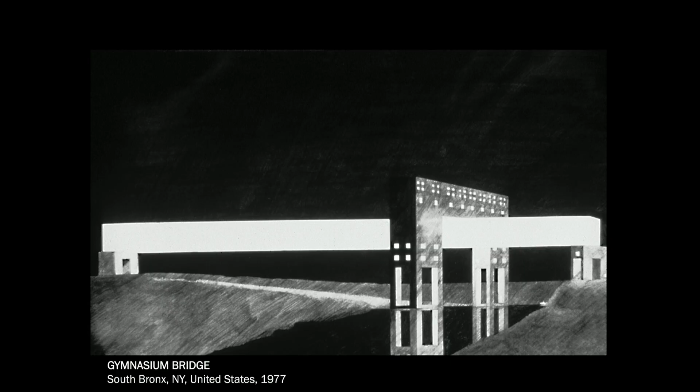So it starts in 1977, Bronx Gymnasium Bridge, a project imagining how people bound in the Bronx could fight their way out. And we imagined a thing called long basketball. You could see it up there, where the basketball court would be stretched to fit into the bridge. And a year later, we did the Bridge of Houses, which was the idea of all the different ways that people can live. There were SRO housing, there was luxury housing, there were dormitories. Different kinds of people live there.

And the idea of taking that High Line and turning it into a public promenade. By the way, that was the first instance that anybody ever thought of that, and now it's one of the great things in New York. We built models, had exhibitions about it.

Two years later, I had a chance to make a house on Martha's Vineyard, and I read Moby Dick, where Herman Melville describes a whale skeleton that is on the beach, and the Indians of Martha's Vineyard draped skin and bark over it and lived in it. That became the metaphor, the idea that drove the design for the Martha's Vineyard house.

In 1988, we won the Berlin Gedenkbibliothek, and the idea was to jump over the original building, the 1950 building. So the entire building became a browsing circuit to activate the composite. In the late 80s and 90s, I did a series of projects called Edge of a City. It was really about the problem in the American landscape.

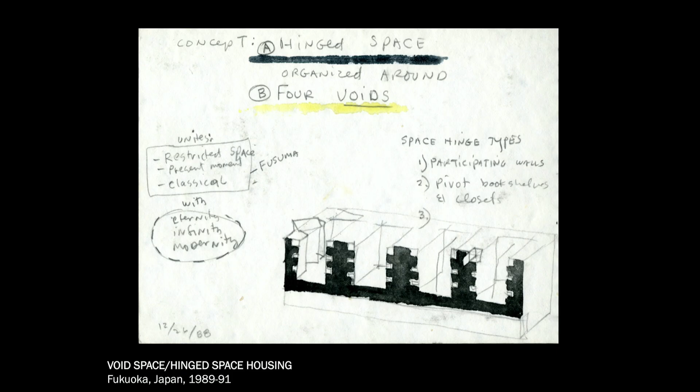Then we were invited by Isozaki to make housing in Fukuoka. I thought, oh my God, what am I going to do? I won't be able to control it. So I had a single pair of ideas: void space and hinge space. The hinge space is about Fusuma and Tsujimi, the Japanese tradition of movable walls, but we made them hinged. The void space is the division of the entire block into four water gardens. There you can see the model, and it's a very successful project.

We were commissioned to do a house in Texas by a very idealistic client, Charles Price, whose father had built the Price Tower in Oklahoma, Frank Lloyd Wright's only skyscraper. So I was really faced with what would be the idea that would drive this design. They took me to the site, and I said, that site doesn't work, I need more space.

The next morning they drove me out to a place where there was a stream and a series of dams. I thought this house could be about stretto, a piece of music where stretto is about moving from one stage to another. We made the whole house about this piece of music. The music by Bela Bartok is in four parts, where the lightweight is divided from the heavyweight. So the whole house is four solid concrete block pavilions with lightweight steel moving between them. The last room is a flooded room where the water comes right back in. I had very idealistic clients, and they built this house.

Almost the same year, I was invited to do the project for Palazzo del Cinema, a very important competition covered in Domus. Every architect got something like three pages for every entry. There was James Stirling, Aldo Rossi, Jean Nouvel. My idea was that cinema is the most powerful form today. You can take what happens in ten years and condense it into a one-hour film, or take what happens in one minute and stretch it into a one-hour film. That concept of an accordion of stretching and expansion about time became the way to do the architecture. It was a project that to me was very important.

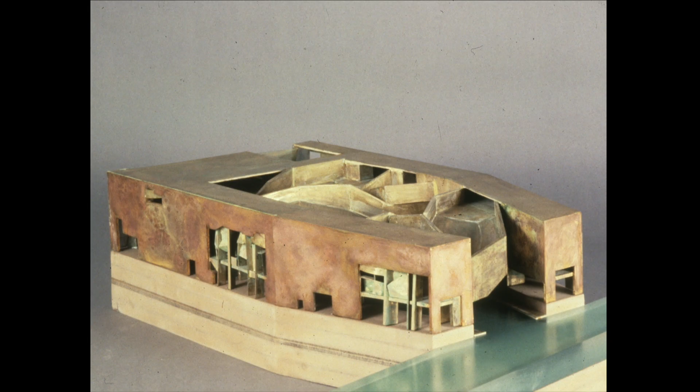It was a seminal project in my life, because at that moment I was kind of unknown, in 1990. We were then invited to do the competition for Kiasma in Helsinki, a great opportunity. I went to the site and imagined this intertwining, the idea that the entire building is a kind of intertwining knot. That was coming from Merleau-Ponty's writings. The last book Merleau-Ponty wrote was The Visible and the Invisible, and the last chapter is called the chiasm, the intertwining. The building was actually named Kiasma, and it comes from Merleau-Ponty.

It's been restored today, it's in really good shape. All the galleries have natural light. I'm very proud of that project.

About two years after that, we were invited to do an entire block in the city of Makuhari, right outside of Tokyo. I said, oh my God, I have to have an idea, this is a big project, what's going to drive this design? I was thinking of the journey to the north by Basho, the great Japanese poet. In this poem, he's moving between pavilions and different places. I thought of the whole block as this journey, forming garden spaces, but then there were these crazy little pavilions, each dedicated to a chapter. The whole block is an exoskeletal concrete structure. It's a very successful project, and it's still there today.

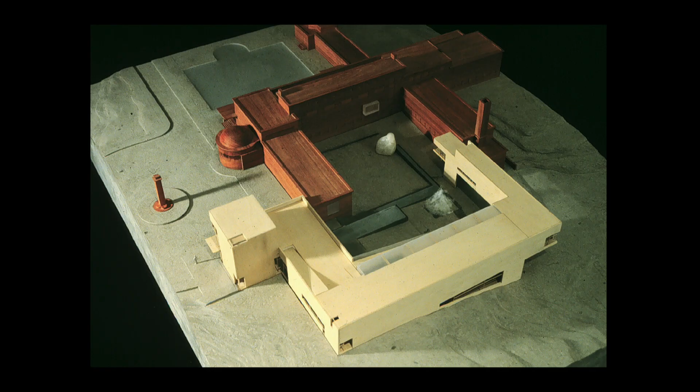Every architect who was being interviewed had to give a lecture, and I gave a lecture about questions of perception.

The Jesuits really have a way of thinking about materiality, light, detail, texture. This notion of seven bottles of light in a stone box really was translated into the narthex, the Blessed Sacrament, the choir, all the different liturgical parts of that building.

It was a long process, and it really is a concept driving the design. It's the idea of an imaginary moment that then follows through the whole design. It's a project really about light and experience.

Going back to that point, you can have an idea that drives a design, but it doesn't necessarily need to be understood by the people who experience the space. They can feel the light, they can feel the power of the architecture, the phenomena. And that's the point.

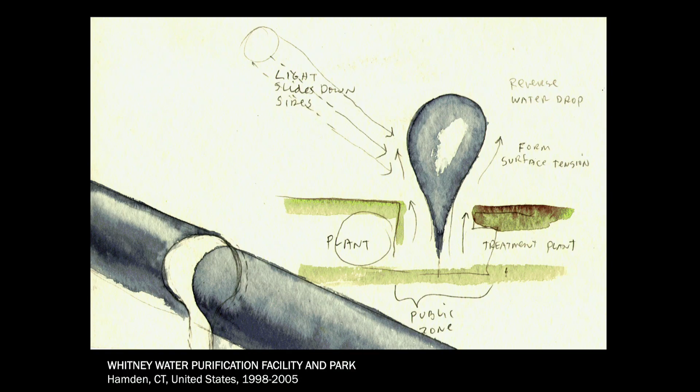And I made this kind of water drop. Maybe it's slightly corny, but everybody followed - all the engineers followed me - and it's the largest green roof in the state of Connecticut.

I think the point about imaginary causes also is if you can get the team and the engineers and everybody to follow you, you can really realize pretty extraordinary architectural projects. But you can't do it from just the pragmatics of the problem.

When we worked in Norway, my father was full-blooded Norwegian, so this is a project very close to my heart. We worked on the Knut Hamsun Center, the museum for the great writer Knut Hamsun. I had read his book, Hunger, when I was in high school, and it's really about a body where invisible forces, psychological forces, are ripping at the body.

So we made this diagram of a body where these invisible forces are acting on it, and each of these balconies has something to do with this novel Hunger and the idea of Knut Hamsun. We produced the design, and then there was a huge controversy, and nothing happened for many years. We won a Progressive Architecture Award. The models are in the Museum of Modern Art, and I thought it would never be built.

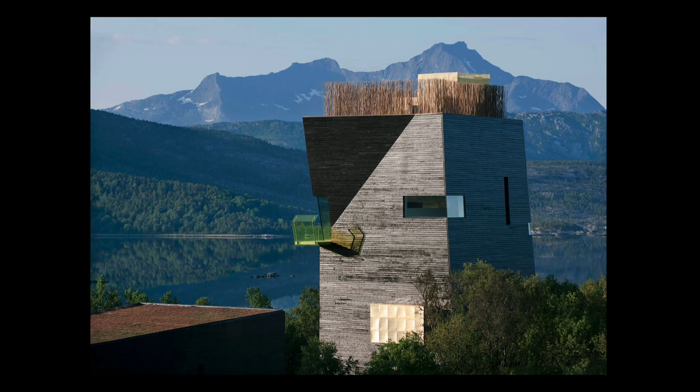But then some Norwegian who was really proud came from Narvik, and he said, I'm going to the government, and we're going to get this funded and get it built. And he did, and it opened. It's been a great experience - it's still functioning very well. I think Iwan Baan showed it in his lecture.

This was a project for a social housing company on Sarphatistraat in Amsterdam. It was a program where they wanted to add a pavilion on the back of this brick building, 17th, 18th century. I was trying to think of an idea that could unify what's going on, all these offices, and then the main space has no particular function. They want to have their Christmas parties there, meetings there.

So there was a pair of ideas. There was a piece of music by Morton Feldman called Patterns in a Chromatic Field, and then there was the idea of a Menger sponge that has the same elevation, plan and section. What's really interesting is because of all this porosity - this is all perforated copper - the color fields are organized and actually located by a chance operation, like Morton Feldman used to make his music.

That also gave us an enormously acoustic space, so you can have meetings in the corner - different people who work there can have meetings in various places all around this building. So this crazy beginning, with this imaginary thought of a piece of music and a Menger sponge coming together, organized something that was very, very original.

I went to the site - this was 1997. There was a house. I had a client who wanted a kind of New York loft up in the mountains, north of New York, four hours north of New York.

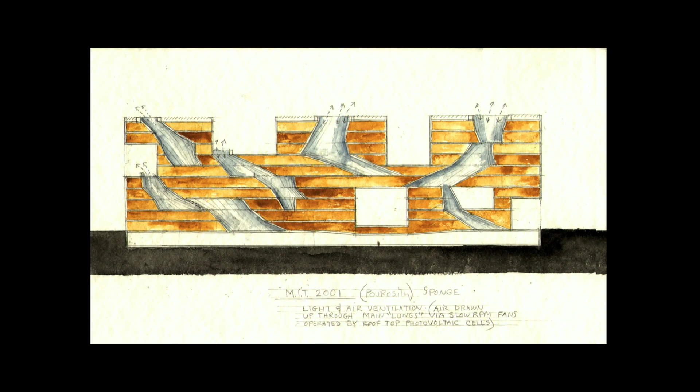I was given the chance to make a big dormitory, like 350 rooms at MIT, and the problem was complex and the timing was very short. We had the idea of porosity, that the building would be a complete porous thing, and the public areas would be connected almost like a carving out. So there's 10 floors, and then there's a kind of carving out.

I got the commission because I told the chancellor, Vassar Street shouldn't be a brick wall. They had a master plan, which was a brick wall that went down Vassar Street, and I thought that's really terrible. We were being interviewed, there were like 3 architects in the final round, and it was Chancellor Bacow. I said, listen, we would like to do a new master plan. Can you give us 6 weeks? He said yes.

Then I made a master plan for the whole of Vassar Street that every building would be porous. So you have the horizontal porosity, then the vertical porosity, the all-over porosity. We ended up building the all-over porosity, which is still functioning very well. We were just there - my wife Dimitra, who's a great architect, a great collaborator. We were visiting there with our kids, and the kids loved it, and everybody living there.

It's been 15 years. When I was invited to do the competition for the Nelson-Atkins Museum, all the architects were supposed to build on the north side of the building, which is on the right hand - you see that black, that's a 1933 neoclassical building. They were directed to build on the north side.

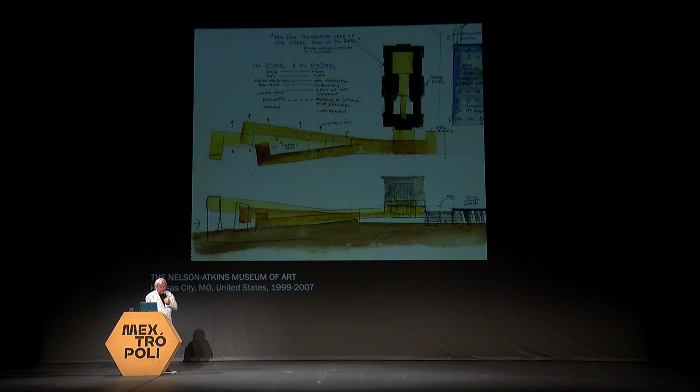And I said we can't do that, that's not an ideal way to add on to this building. When I went down on the landscape, I refused their directive, and we were the only architect that broke the rules. Tadao Ando slammed it right up against it, Portzamparc slammed it right up against the north. I said, I apologize, because in your original stone facade there's an inscription that says the soul has greater need of the ideal than of the real. That's where I got the courage to break the rules and try this addition.

That was one of those moments where the idea that drives the design is really why you win the competition. You take risks. If you have an idea, you imagine something, you take risks, everybody follows you, and then you can do something you would never be able to do without that crazy, non-rational moment in the beginning.

In the beginning of the project for the School of Art, in the middle of America, in Iowa, a very conservative place - University of Iowa - we were invited by very great people. Dorothy, the head of the art department, was really wanting a great building. So we had this thought of actually cantilevering the building out over the lagoon and making the whole building out of Corten steel, a planar construction.

And it's still there today. And this idea of planarity, folding up, going up, also gives a way of dealing with the interior. So the stairs that move you through the building are a series of folding planes cascading down through the building.

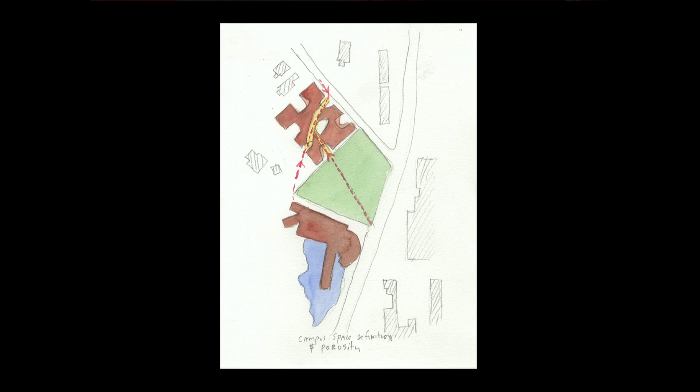Then several years later, we were invited to do an addition. It wasn't really an invitation, it was another competition against Diller Scofidio and a bunch of people. So we came to the site, and now, because I had built the first building over the lagoon, the great green space, a quadrangle, could be given over to the art school, because there were going to be two parts. I won't tell you the whole story of the flooding and everything that caused this to happen, but the point is, we had a struggle because Kenneth Frampton said, Stephen, you should build that in Corten like you built the first building.

And I said, well, why? He said, well, it's a university, you should make everything kind of coherent. I tried so many schemes and I didn't like it, and everybody in the office agreed we have to do something else. And then we said, okay, the first building was about planar construction, and the whole thing is an abstraction of plane, almost like cubist construction.

And then the second building is volumetric, made out of double layers, and it has a series of light cuts that bring light and organize social space in all parts of the building. It's 300 feet by 300 feet, a very big project, and as you go down through the building you have social space - it's really a way of organizing everything. This is, by the way, nearly a net zero building, with geothermal heating and cooling, green roofs, many different aspects, but that's not what my talk is about.

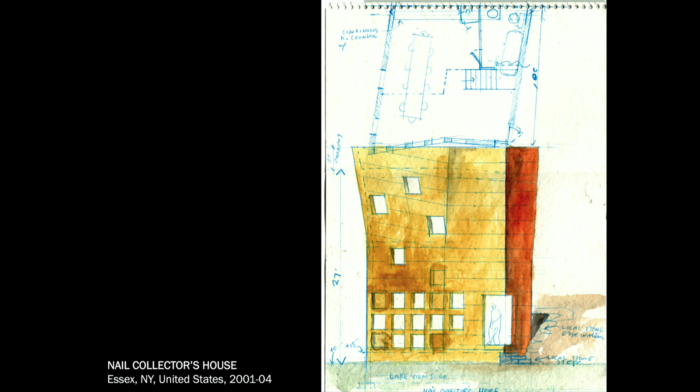And he had a nail collection, because on this site there was a series of square-headed nails from the 19th and 18th century in upstate New York. So I made the idea based on cartridge brass and exposed nails, and that became the driving concept, which he loved, and it's still there today. It's sitting on this old site where there was a nail factory, in Essex, New York - that's the lake that connects to Canada up there.

I was invited to Beijing after we were invited by Isozaki to do the Nanjing Museum. I was invited to do these 8 towers that were supposed to be built according to the planning diagram, and they wanted to keep the central space with a bunch of factories, using them as art buildings. I said, listen, if you give us 3 months, we're going to do an ideal design for you. And they did - they gave us 3 months, and we proposed that these 8 buildings would be linked by bridges full of functions, like a swimming pool in one of them, and instead of the old factory in the middle, we built a cinematheque and water gardens.

This is 2002, and everything in China was happening for 2008 - everybody was very excited to do something really ambitious. So we presented this and I thought they'll never build it, it's too far out there. About a month later they sent an email saying, we've looked at your project - it had cinematheques, a nursery school, bridges with swimming pools - it greatly exceeds our budget. However, we want to build the whole thing, don't take anything out, which was amazing. And that's how the linked hybrid got built.

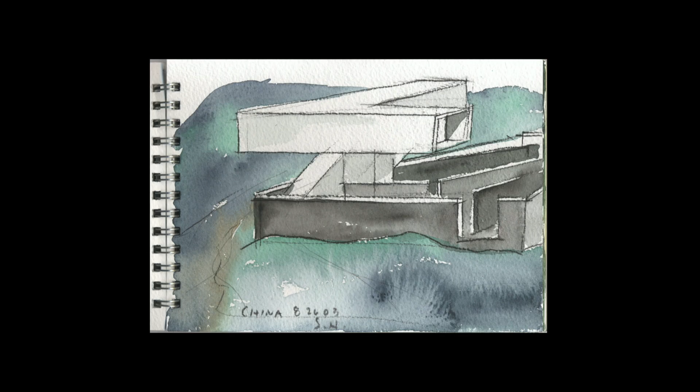Actually, we have our office there in one of the areas. And this is the building that got me to China in the first place - it was Isozaki inviting us to come, and I was a little bit frightened. If you go online there's a whole video that explains this building in detail; to do it justice briefly, it was the notion of projecting an axonometric of Chinese watercolors - everything was black and white, and the idea of the projected space was what organized the building. It's kind of the head building there, an architecture exhibition really, in a park just outside of Nanjing.

We entered a competition for the Herning Museum in Herning, Denmark. That year I was really nervous because I kind of ran out of time, and we actually did this competition very quickly.

They had the greatest collection of Piero Manzoni, the great artist who used fabrics. There was a shirt factory on the site, and the owner invited Piero Manzoni to come. You can see the shirt factory is that round thing in the corner. I had this idea of shirt sleeves draped over the basic rectangle of the building, bringing the light in a curve. That idea drove the design, and we won the competition.

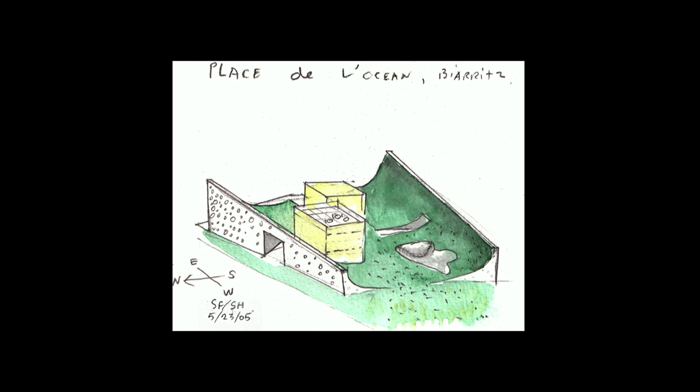Holger Reenberg was a great client. Another competition we won that same year was in Biarritz for the Museum of the Surf and the Sea. The notion was that under the sky and under the sea, the whole building would tilt and aim itself toward the ocean horizon. It's a simple building, there were like 8 competing architects, and we won it. It's there now in Biarritz today, my only building in France.

We were invited, after the Beijing linked hybrid was under construction, to do a very large project for Vanke in Shenzhen, a headquarters, a hotel, their offices, apartments. I thought, it's right there on the sea, so why not just raise the entire building up to the height limit and open up the whole landscape down below as a public space, a tropical landscape.

When I presented this project, Wang Shi, the director of Vanke, there was a room with about 10 Chinese all around the table. I was presenting the competition, and he said, I want to hear what everybody else thinks. Nobody in the room had the courage to say they liked it. But when he got around to it, he said, I love this idea, and I love the shape, and he put his hand out like that.

And that was it. I think I saw him two more times. We won the competition, and this is the kind of thing that was going on in China at the time - they got the building permit in 10 days, for a building that's elevated about 30 meters in the air. Anyway, that's a different lecture.

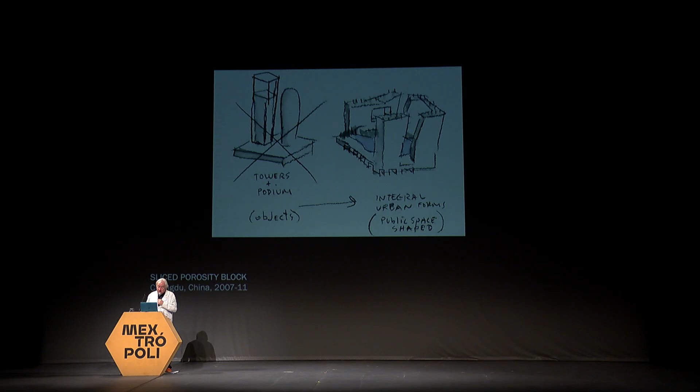3 million square feet, it's the biggest project we ever did. And I said no, and I made these watercolors. I said what we want instead is an integral urban form with the housing, the hotel, the offices, forming a giant public space for everyone. Not only that, it would be geothermally heated and cooled, with kind of micro-urbanism where the shops from the shopping mall would have fronts on the street all the way around.

The building had to be organized by these light shafts bringing light down to the adjacent housing. Once we made the diagram, it had to be sliced by these angles of light, and that's where I gave it the name sliced porosity block. It's an exoskeletal frame, so you're looking at the structure, not any skin, which I think is really wonderful because you have layouts that are very open. There are no columns, so all that structure is on the outside.

And then we did these buildings within buildings - you see these cuts. Lebbeus Woods's largest building that he ever did, the Light Pavilion, is on the right-hand side.

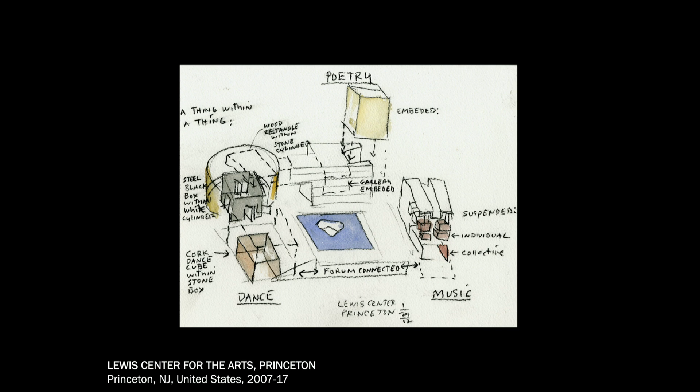Then in Princeton, we were given the chance to do the Lewis Center for the Arts. Very interesting project—it's basically the entrance to the Princeton campus. I thought, let's make it in three parts, each with its own idea, because you have the music, the performance, theater and dance. So each section of this kind of U-shape has another idea driving it. And everything is golden section proportions, which is something all of our work relates to. The proportioning of architecture is infinitely important to me. There you see the model, the Lewis Center for the Arts, and that opened in 2017.

It's a long story—I could spend an hour giving a talk on this. It's a very important project, and there's a video on it if you're interested to watch it online.

I had an interesting moment where a man came to me from Korea and asked for an ideal house. He had interviewed all these important New York architects. I had a kind of crisis because it's an interesting urban site, but other than his basic program—he had the idea of a guest house, wanted a house and a guest house—I didn't really have a direction. In fact, I made a series of really bad, throwaway designs.

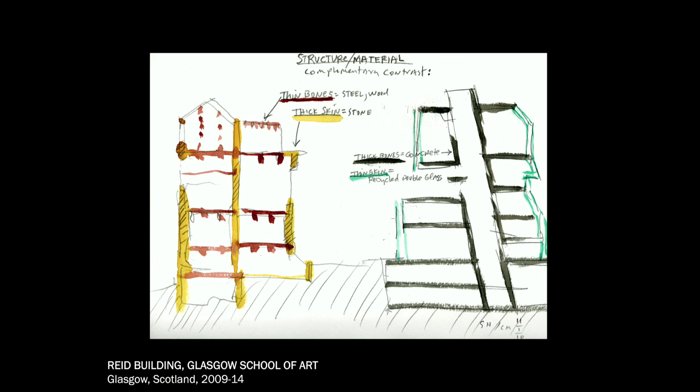When we were invited to do the competition in Glasgow for the Glasgow School of Art, I looked at the great building by Mackintosh, and I saw the structure is sort of light bones and heavy outside—heavy, thick masonry outside. I said we should reverse that. We'll make very light recycled glass outside and heavy tubes that support the building on the inside. These are driven voids of light, also a strange thought. We won the competition, and that's a long story, but it's functioning very well right now in Glasgow.

If you go to Glasgow... I was given the chance to do the Queens Library, a community library, and the site was very large. In fact, the whole library could have been built on one floor. But I said, listen, one of the great things about this site is you see Manhattan. To give the public this fantastic view of Manhattan from Queens across the river—and it's situated right by Lou Kahn's last project, the FDR Memorial—I thought, you've got to make it vertical. It's a long story, but this idea of proceeding through the building, up the stairs, past the bookcases, children's library in these cuts, public space on top—it's still there and functioning very well in Queens.

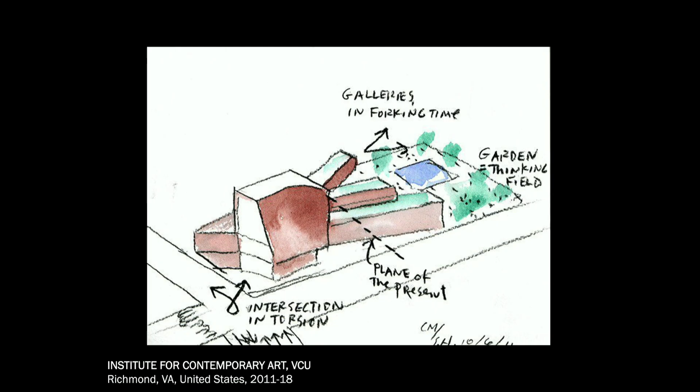Down in Richmond, Virginia, a very conservative town, we were invited to do a project for the Institute for Contemporary Art. I went to Borges, the Garden of Forking Paths, a great book by Borges, which is a little bit about time. The way I explained this project: today, this is a contemporary art museum, and there's no grand narrative. You could say in the abstract expressionist period there was a grand narrative, in the Cubist period there was a grand narrative, but today painters paint incredible things, sculptors are working—there's no grand narrative. So it's a forking building, and that was realized and opened in 2018.

I'm running out of time—that's what's going to happen here. Look at that. So you'll have to look this up on my website.

This is where we, again, refused the competition rules. We tore down the Glassell School of Art, put the parking all underground, and realized the Glassell School and the Museum of Fine Arts in Houston. Again, breaking the rules was very important.

And the Kennedy Center, similar. They said you can't build it in the garden out there like that, but we did it. We broke the rules, and that was realized and opened in 2019.

It's fantastic. And the Institute for Advanced Studies in Princeton, also a very important project, against a number of illustrious architects, which we realized again with this not-so-crazy idea.

And the Meander building, a housing building which is bounded by blocks all the way around. So instead of putting an urban block, the idea was that you could shape the space, shape these garden spaces all around this building. And that became... and this house - time's up. All right, I won't talk about it.

That's a building we jumped over, in Ostrava. It's under construction. It's a music hall. And the point of the lecture, I think, is clear. I'm sorry there's too many buildings.

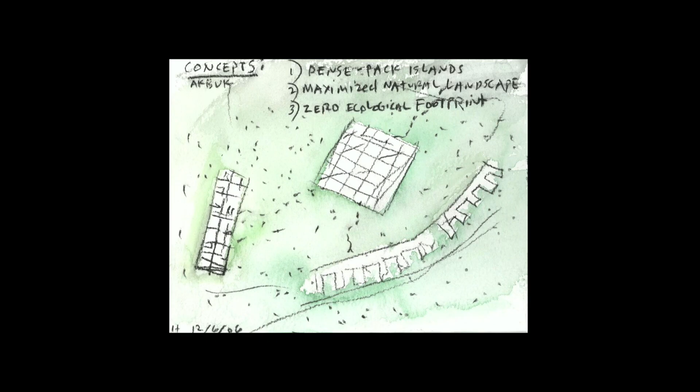I just want to end with this, because I started this in 2006. I had the idea of a dense pack. I said, let's just organize all these houses - it's quite a big piece in Akbuk, Turkey. We'll put some of them under the ground, some in the ground, some over the ground, in 3 parts. And we presented the project. It's really interesting because it's like a city. It has a chapel and a public space, and now they're building the whole thing.

It's a very long story, but I'm very proud that idea has been taken up by another developer after it sat for many years. So I'm still working on a project after 17 years, and my point there, to end with, is architecture takes time. Thank you.

Che commissioned us to imagine and envision a seed bank and ecology library as potential inter-Korean collaboration. We proposed repurposing one of the 4 tunnels North Korea excavated in the 1970s, now dark tourism destinations. Tunnel 2 would become our vault for life and knowledge, an analog archive for seeds and ecological knowledge.

Our intervention began with a 10-meter excavation where 2 tragic man-made lines intersect, the border and tunnel. This acts as a landscape acupuncture, relieving territorial tension and restoring natural energy flow while making renewal. Granite rock blocks excavated from the void would migrate gradually to both sides, north and south, forming a scale plinth for 2 preparation facilities, one housing the seed bank, the other the ecology library.

This year, Che launched naturalrules.net, a beautifully designed platform documenting DMZ ecology extensively. You can check your phone. Visitors can purchase seed bombs for 70 cents each. Collective landscape nurturing through drone-facilitated DMZ reforestation. Che's retrospective opens later this month at Seoul Museum of Art, and it will be a beautiful exhibition as well as compelling campaign.

Let me briefly go back to the Korean Pavilion in 2014. Among the exhibition images was Kim Jong-up's French embassy in Seoul. Though photographically unremarkable, architectural historians canonize this building as one of Korea's most significant 20th century modern works. Completed in 1961, it represents early work of Kim Jong-up, who spent 4 years with Le Corbusier in 1950s Paris.

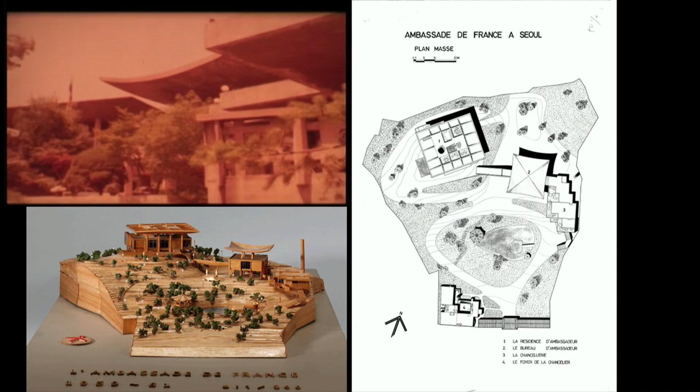The original embassy ensemble crowned a gentle 15-meter hill as a cascading triptych: residence above, curved roof pavilion, and office annex. The pavilion's curved roof was most distinctive, clearly echoing Le Corbusier's unbuilt governor's palace in Chandigarh, which Kim worked on. Yet its abstract spherical surface carved into a square plan also evokes traditional Korean roof profiles.

Kim studied how Korean mountain temples engage topography, evident throughout the embassy ensemble. However, unlike the traditional temples that nestle modestly in valleys, this ensemble sits prominently on the hilltop. With the Han River once visible 3 kilometers away, its positioning reflects Le Corbusier's Acropolis ideal over Korean precedents, a unique fusion of influences that was.

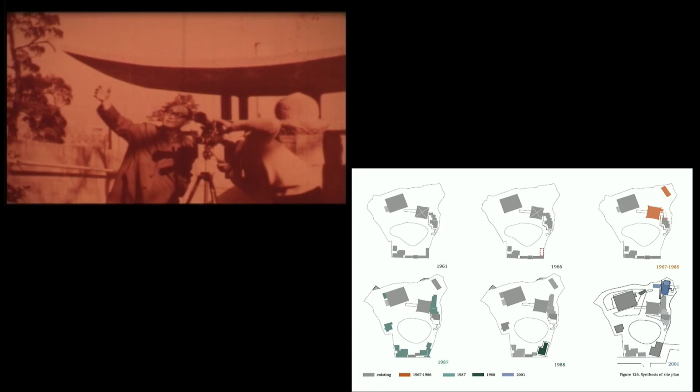60 years later, this French territory has grown haphazardly to increase capacity. The pavilion suffered significantly, nearing collapse due to poor construction quality, then was tragically compromised when recreated in the 1970s—the reason why we couldn't obtain proper photographs for the Venice show.

Both the embassy ground and the surrounding city evolved from single-story wooden houses to 16-story towers. This transformed the former hilltop complex into one now nestled in an artificial valley, ironically creating conditions more aligned with the traditional Korean temple placement.

In 2015, we collaborated with the Korean-French architect Yoon Tae-hoon and his Parisian firm Sathy, winning the competition to restore the pavilion and add workspace four times larger than the original size. Our challenge was playing a supporting role through a much larger scale to this historically significant building.

We introduced two elements. The unrecognizable annex becomes La Jetée, a two-story, 60-meter horizontal building, maintaining the old annex's sectional relationship. It houses public functions, visa services, meetings, and new exhibition space. Second, we designed a 10-story tower for high-security workspaces.

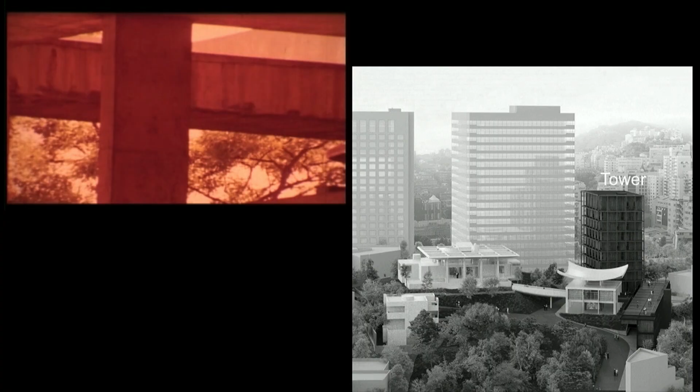This compact tower mediates between the original complex and the radically verticalized urban context, offering intermediate scale while enhancing exterior visibility. In plan, both new buildings relate to the original structures in distinct directions.

La Jetée adopts the same 4.5 meter square grid module as the original pavilion. The pavilion was completely rebuilt to identical original dimensions while embedding four central steel columns for seismic requirements. The roof was post-tensioned from above while preserving the exact formwork finish below. We relied on not so many drawings, photos, and movie clips, and so on.

After completion, Kim Jong-up's apprentices, now in their 70s and 80s, gathered for a ceremony where the French government officially designated the Kim Jong-up Pavilion—a building surviving three reconstructions over 62 years, within its context transformed from mountain to valley.

Fourth challenge: mountain becomes valley, expands into exploration of urban transformations over the same period in the next project, subtitled Rocky Riverscape Become Flat, which examines the changes along the Han River in Seoul.

Yes, it was quite a brutal process because all the rock became riverbanks for flood prevention, and this is what we call the miracle of the Han River. Located at what was considered one of the 8 great viewing points of the Western Han River in the past.

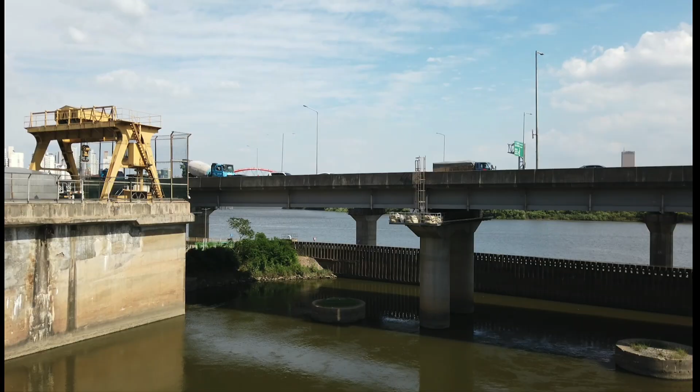It is now trapped between a high-speed road and high-rise apartments through the rapid flattening process. The site's riverside ground surface barely exists, offering no river views despite its proximity.

So our main idea was to amplify the potential for accessible collective space by proposing the Dangin-ri Podium, a place that substitutes for the viewing points of a rocky, hilly pass along the Han River.

We've connected and rebuilt the lightweight rooftops of two turbine halls, 18 meters above ground, as a 130-meter-long elevated public space with escalators that offer direct access without needing to pass through the building's interior.

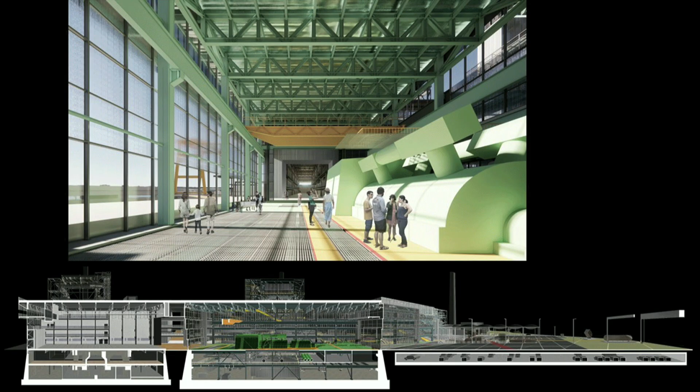And on the ground level, turbine hall 4 is converted into a black box theater, and 5 is preserved. The two linear spaces can be connected by raising linear vertical lift doors, creating a 130-meter-long space, which further expands into a 120-meter-long linear outdoor space, a public plaza with underground parking below—resulting in a combined 250-meter-long indoor-outdoor space, ideal for large events.

So Plant 5's boiler is kept as industrial heritage, while Plant 4's boiler is removed, creating a 49-meter-tall void. The void is divided vertically into 3 parts: exhibition space 10 meters below ground, and a large gathering lounge on the 2nd floor, both connected by ramps along the edges.

Above the podium, the remaining 21-meter-tall top portion of the structure, which once suspended the boiler, will be repurposed as a hyper-pavilion, with bleachers on the podium and a lightweight roof above.

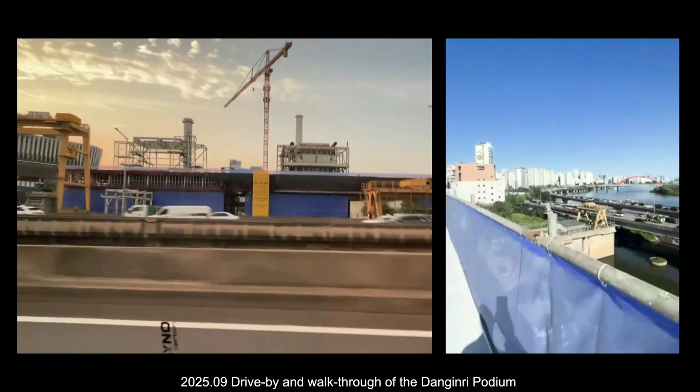The original boiler maintenance catwalk remains as a viewing promenade that completely envelops this 49-meter void in a spiraling sequence, offering spectacular views of interior activities and the completely transformed Han River with its artificial topography.

Okay, here's another thing about the movie now. Chungmuro's transformation tells the story of Korean cinema itself. In the 50s, this district earned the nickname Hollywood of Seoul, becoming the epicenter of Korea's film industry. The golden age arrived in the 60s when cinema was a dominant entertainment medium.

Legendary theaters attracted people with marquees, and of course TV challenged the dominance. In the late 1990s, Korea became democratic with freedom of expression, which nurtured a generation of filmmakers like Park Chan-wook and Bong Joon-ho, who later gained international acclaim, coming out during this era as independent filmmakers. But at the same time, it became a global industry, so old theaters became multiplexes, complexes became a sort of pseudo-urban experience—what used to be essentially a very exciting urban experience.

So our first architectural engagement with Chungmuro came in 2001. While practicing with James Slade in New York, we partnered with Kim Kwang-soo in Seoul to transform an underused Chungmuro subway passage. Seoul's cultural department envisioned it as a cinema gallery, essentially movie poster displays for 2002 World Cup tourists.

However, our collaborator, the Independent Filmmaker Association, had bigger dreams. This young, predominantly female collective demanded a genuine community hub for film activities. So we responded by designing a linear sequence within the 6-meter by 70-meter long passage: a flexible 50-seat theater, an experimental film archive, intimate viewing lounges—revolutionary before YouTube existed—and a cutting-edge digital production classroom.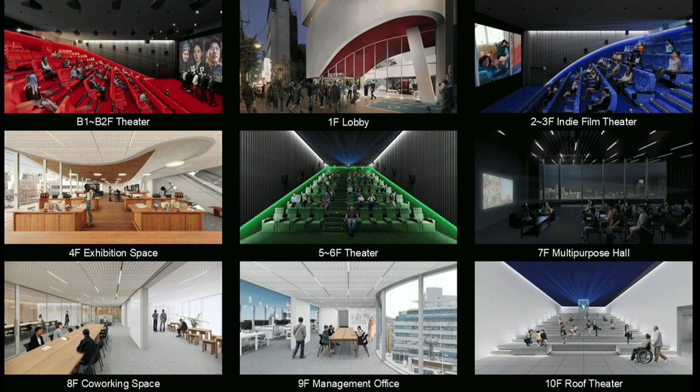This journey spans 23 years, from a 70-meter horizontal tunnel to a 60-meter vertical tower. Both subway passages and towers can feel like anonymous non-places, yet in each case we've crafted, I think, quite rich spatial montages that respond to urban constraints while nurturing Chungmuro's evolving creative community.

The next one is only steps away from Seoul's historic center. It's about religion, 100 meters from Changgyeonggung Palace. Won Buddhism emerged in 1916 as Korea's modern spiritual movement, with roughly 700,000 followers in Korea. This Zen Buddhism sect centers on the circle as both philosophical guide and cosmic symbol. As an agnostic, I found it quite interesting that modern ideas such as circularity or circular economy now resonate with this religion that started more than 100 years ago.

Here's our first encounter: the former temple had to be replaced due to aging. We inherited a half-century-old temple requiring complete reconstruction within Seoul's chaotic collision, where centuries of architectural styles, scales, and materials create a cacophonous symphony in a way.

The challenge was 4 distinct buildings across 3 sites, each serving different congregational needs. On the main road, 14-story towers dominate, yet a fragment of the original hillside persists, connecting to traditional alleyways behind the modern wall of towers. Our first intervention transformed a former residence into a 3-story annex, housing meditation offices and flexible space as a sort of pop-up space—right now it's a children's bookstore.

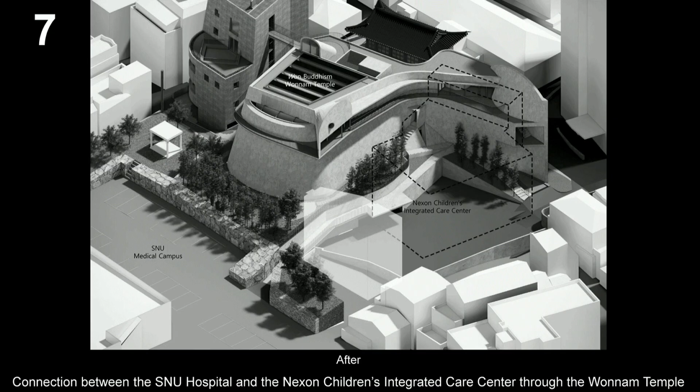This circulation became a three-dimensional promenade, what they call 'paths of enlightenment,' punctuated by moments of stillness in movement, such as the prayer room at the top of the Dharma building, which finally revealed the genius loci — why it was placed there 70 years ago, with the palace view.

The top view here is the monastery rooftop, which almost culminates like a panoramic view, like the end credits of a movie, where all the protagonists of this urban element, from the very beginning to the 21st century, reveal themselves.

Lastly, I'm going to talk about the seventh challenge. This year marks the 25th anniversary of the Serpentine Pavilion program, and I was honored to design last year's pavilion, which felt like a great riddle and quite an unexpected opportunity.

Okay, I have to, sorry.

When the program started in 2001 with such optimism about the new millennium, Google had just started. We thought we'd all become connected and happy, celebrating diversity. Then the smartphone appeared a few years later, in 2007 and so on.

A quarter century and two dozen Serpentine pavilions later, we are somewhere in a quite different place. Looking at the floor plans of the previous pavilions — 8 were circular or round, 6 rectangular — so two-thirds were complete geometry, and the rest free form.

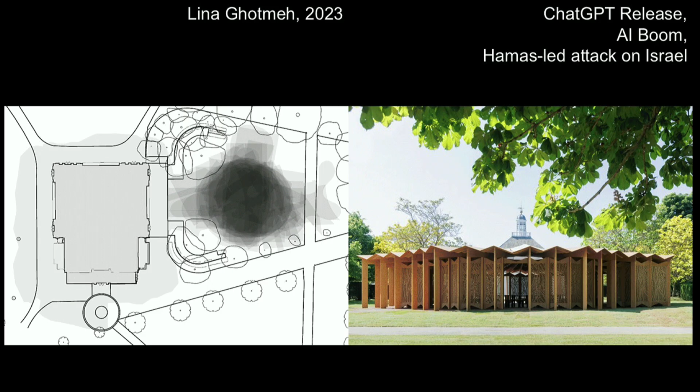Look at our own pavilions — Mass Studies started in 2003. Almost during the same period, we also proposed many circular plan structures, for some reason, almost two-thirds. In fact, we can trace this tendency toward utopian completeness through the entire 20th century, from Bruno Taut, Buckminster Fuller, the hippie era's Drop City, and so on.

So first, we decided to give the most overused central territory of the Serpentine lawn a rest by creating a void, and began to look at what could happen at the periphery.

Each structure, or what we call an island, is simple. Each outer tip of the island is unique in shape, form and scale — wide to narrow, high to low, small to large. However, toward the center, all 5 islands share the same end condition, the same arc length at the same height, coming together to form an 8-meter diameter circular void.

Each island was given a specific program, a distinct function, yet remained flexible. The gallery welcomes you at the main entry with a sound installation made with a close friend, Korean composer Jang Young-gyu.

The auditorium is the largest room, serving as a general gathering area and performance venue. Again, my good friend Eun-me Ahn brought a troupe to perform a piece called North Korea Dance.

For the library, we tried to reflect the Korean literary tradition within this genre of architecture, teaming up with Singaporean artist Heman Chong on a conceptual serial work titled Library of Unread Books.

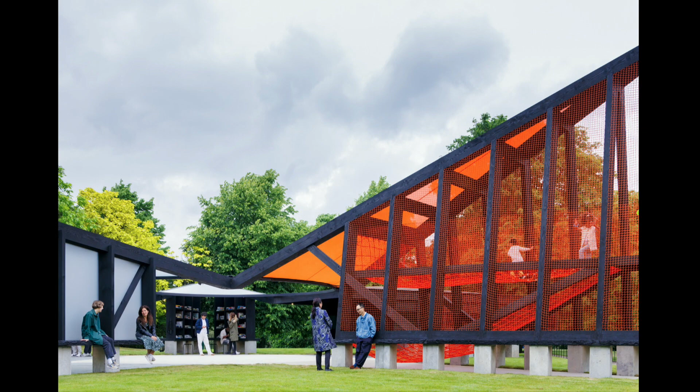Lastly, the play tower — a narrow, 7-meter tall structure, which was quite popular with children and students.

These five covered spaces alternate with five open spaces in between them, with the madang, the central void, at the center. In the end, all eleven spaces maintain distinct characters yet stay very connected. The pavilion created an appropriately scaled space with a balance of openness and enclosure, distance and intimacy, allowing occupants to be apart or to be together.

The central void is this Korean madang, which in a Korean house supports the everyday to some big collective rituals, and many unexpected events happen there. Together with sound, taste, and scent, tactile experience was also generated by the soft pine wood structure that functions also as benches and counters.

Natural timber was used on this lawn for the first time, sourced from Surrey, just thirty kilometers away. We exposed modern joinery techniques alongside traditional joinery, a dialogue between vernacular and contemporary. We also used natural stone paving, lightly fixed for reuse, and low-carbon, reusable precast concrete and foundation for the plinth, so it's all reusable.

The plinths utilize topographic changes, installed at the same height while the entire site slopes about seventy centimeters. At the highest level, they're used as benches at the auditorium, starting at thirty centimeter height, then gradually becoming one meter tall on the other end to use as a counter surface for the tea house.

Sorry about that. But here's a selection of projects on the drawing board right now. I'm doing a Faculty of Information, top left, at the University of Toronto, towers in the Olympic Park, co-housing projects in London, a science pavilion hub in Cambridge, and towers in Taiwan. So a pretty diverse array of projects.

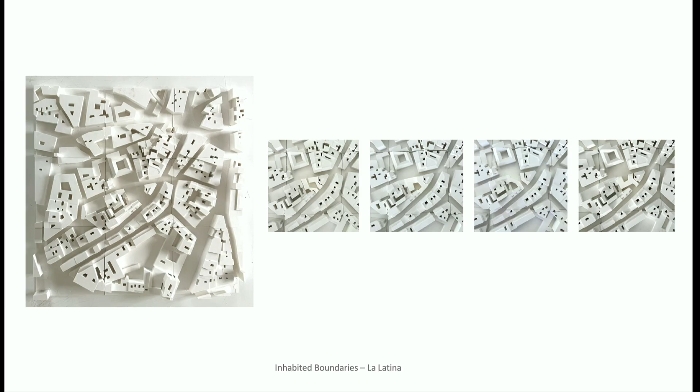Many students from this side of the Atlantic, and we worked on a site in La Latina in Madrid. Here you can see the empty site in the middle of the model, and there are four different variations of a housing project as an infill on the site of a former fort, the Wall of Madrid. All of these projects explore the nature of the wall and how we might inhabit it, as a means of communion and dialogue with the street, and as a way of embracing nature.

So I have a large portfolio of housing. A lot of it is working with geometry to alleviate density. I've also exhibited twice at the Venice Biennale, both within a theme of housing.

In 2018, the Grafton Architects curated the Venice Biennale with the theme of Free Space. This installation explored four key elements or ideas in housing. So these four totems each have an identity. The arch is expressing or offering the experience of threshold.

Another totem is inhabited roofs. Another one is the idea of passage and journey. And the one on the right is inhabited boundaries. All of them played with optical illusion and experiencing phenomenologically the qualities of space that you can achieve in housing. And then in 2021, this was my installation

in Hashim Sarkis's Biennale, How Will We Live Together? Here, this installation called Home Ground was a kind of table with a sort of Campo Marzio of many of my housing projects. I separated the upper stories, the private realm of those buildings, from the ground, to illustrate and celebrate the way housing projects work as spaces of community, of gathering, of social exchange, and obviously commercial opportunities as well.

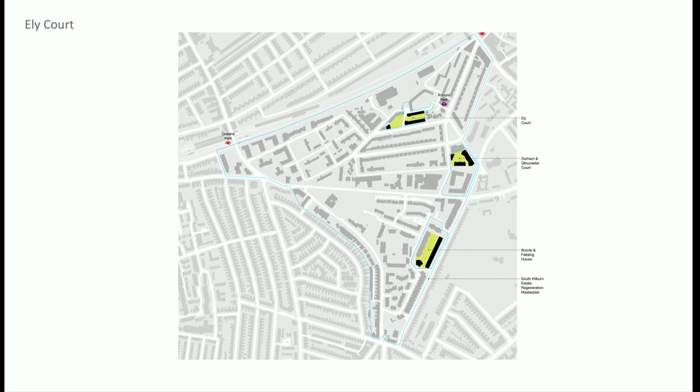that the London Borough of Brent decided to regenerate in the early 2000s and commissioned a site-wide master plan, a 25-year master plan with about 30 sites around that entire district. You can see the difference in the figure ground plan between the fabric of 19th century Kilburn and the South Kilburn estate, which was a really dangerous place to live. So this project was a competition staged by the borough, the municipality, a really quick competition.

You can see outlined, it's a kind of piece of semi-occupied land with 2 buildings with 8 maisonettes oriented diagonally to the street, with familiar slab blocks from the 60s forming a backdrop. Basically it was a sort of backwater—you wouldn't go into this site unless you had to, a condition of many housing projects from the post-war era.

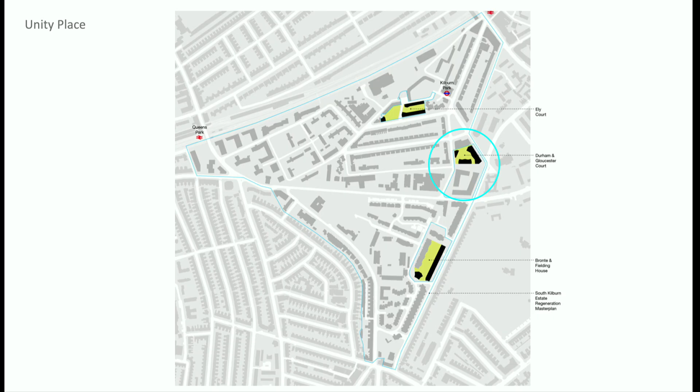But the rest of the estate had about 7 blocks with this exact format: tower, slab block, with a bunch of pavilions on a parking podium, with a kind of moat around the project—basically a no-go zone. You just take your life in your hands going anywhere into this podium.

This project was kind of densifying the mansion block model, so it's 6 stories high, working really hard to provide the density of the competition brief. This was an opportunity to be more playful and animated with the balconies, and to create a really big contrast between the language of the street and the internal courtyards—this is the private communal garden for the 3 buildings that form its edge.

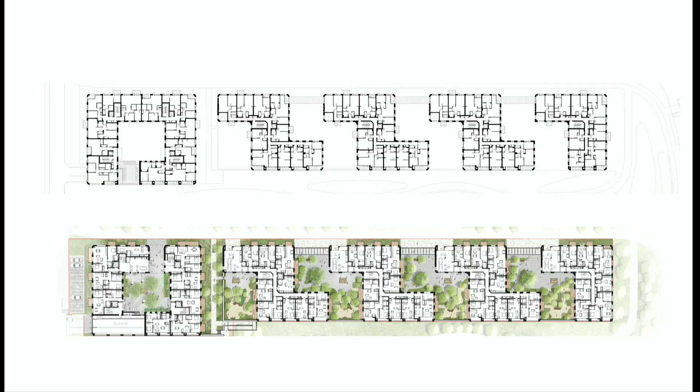So these ideas were informing the strategy, and here you can see the result. It's also a strategy for density. Those Z-shape plans allowed us to get an entire extra building onto the plot and increase the unit count by 30 units, I think, because this was a developer-architect competition. And the courtyard building on the end is again echoing the Cambridge court, and 40% of this strip is also social—subsidized university worker housing.

So here you can see how those Z-shaped plans allowed a city-facing courtyard and a rural-facing courtyard, and create a kind of meander between them. And here you can see the streetscape that resulted from that. It's a slightly porous streetscape, with the idea of a roofline, a meandering or undulating roofline that echoes the warehouse, but also the landscape of Cambridge itself, breaking the rule of the straight parapet, the threshold condition, the courtyards, which are used by residents, and the co-working spaces.

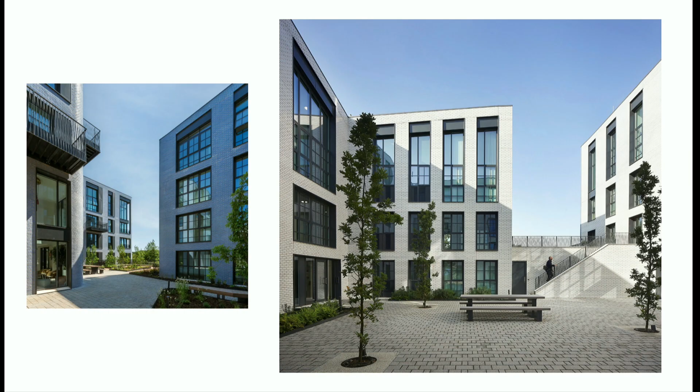And we worked so that basically residents meet each other in the co-working foyer. I always put co-working spaces in the lobbies. There's no point in a lobby unless it's usable. So these are the courtyards and homes that we've managed to bring in a relatively urban way to a quite rural setting, a kind of urban edge setting.

Okay, I'm going to have to speed up. So the next idea or theme I want to talk about is this idea of welcoming gravity. And this is in relation to a project that's now called Cadence in King's Cross.

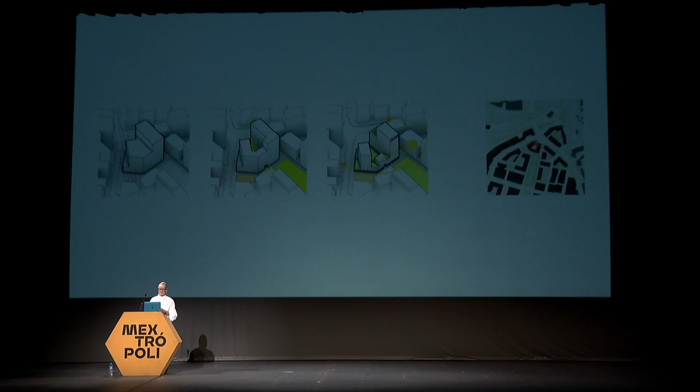And so these diagrams show the master plan parameters on the left. There was a very strict envelope, 15 stories, with the Thameslink train tunnels running under the left part of the site, and a series of carving out that mass to achieve ideal residential depths for the blocks, and then manipulating the height to get light into the courtyard.

And so it became a sort of courtyard tower hybrid. And this here are the kind of iterations during the competition process. It could have been a podium tower, it could have been many things.

But this idea of bringing a sort of exuberant language of arches, really channeling George Gilbert Scott. I think he's got 40 different arch types in St. Pancras Station and St. Pancras Hotel. So these are kind of trying to find ways of reinterpreting the arch in a contemporary way.

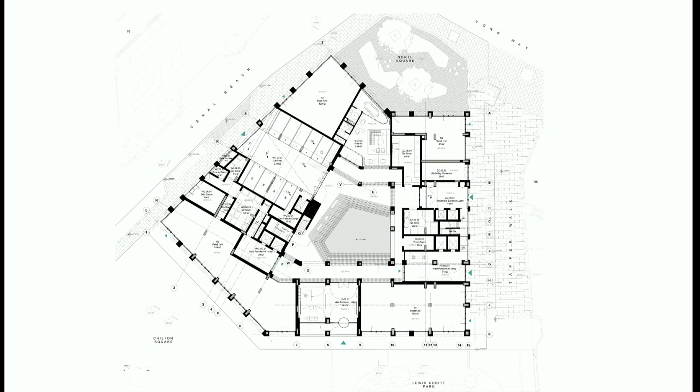Here it is in our recasting model for the Venice Biennale, and just a quick journey through. So the arrival moments, a sort of colonnaded entrance foyer, playing a trick with mirrors, and then these are renders of the reflecting pool, and then the sort of really fantastic quality of living space with high ceilings and amazing views.

We did the full construction documents. We scripted every brick in the building and designed it to be fully prefabricated. So every piece of the building is 85% prefabricated.

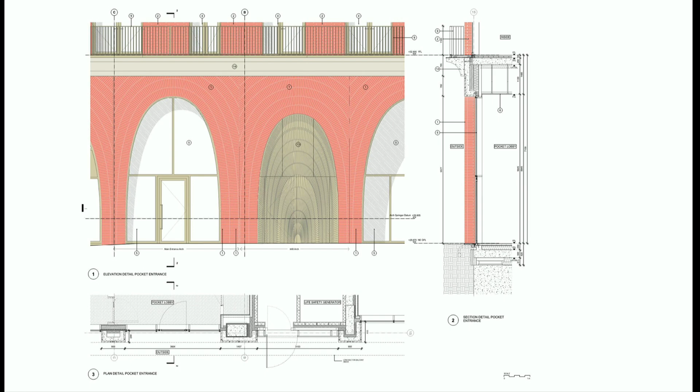Here's the ground floor setting out of some of the arches, panelized facade. So it's brick on precast. So here are the panels being made in the factory in Sheffield.

So bricks laid face down on formwork, and then concrete poured on top, and the panels tilted up and pointed in the yard. So the quality control is amazing. The site is super clean because there isn't a kind of materials compound to deal with. So the frame went up and the facade at the same time.

So really quick, practically zero waste as far as construction sites go, and the final scheme. And here are, again, a sort of journey around the building, the approach from the south.

There is an idea of the picturesque here. I think most architects don't talk about the picturesque. They call it the Instagram moment, but I think that's just a contemporary way of saying a picturesque composition.

Here are some details of how we dealt with the panels and corners, using elements of precast concrete, the colonnaded reflecting pool, the reception area, and here's the reflecting pool looking into the community space, the staircase to the cycle store, and then some of the units have these fantastic arched windows.

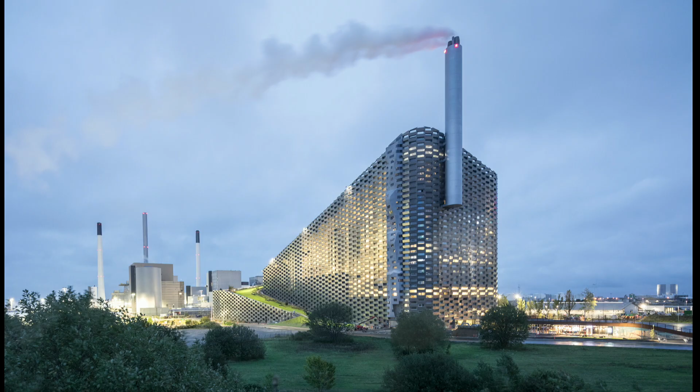The building is the cleanest waste-to-energy power plant in the world. It's so clean that the steam coming out of the chimney is cleaner than the air of Copenhagen. So we could turn the facade into the tallest man-made climbing wall in the world.

You have to be a pretty skilled climber and fearless. If you are not fearless, you can take the elevator inside and admire all the technology that scrubs and filters particles from the air and CO2.

And you can make it to the roof, which is like a man-made mountain where you are free to hike and picnic and downhill ski.

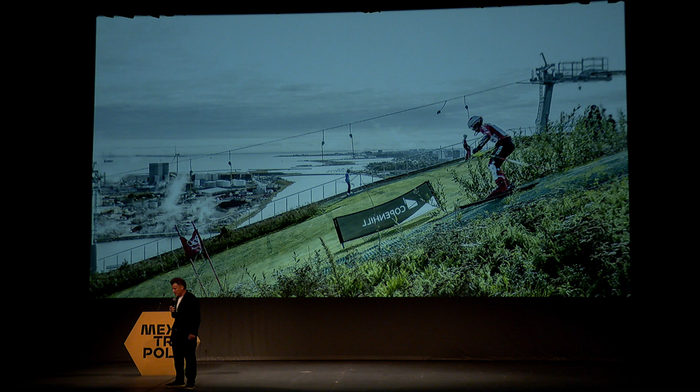Denmark notoriously never wins anything in the Winter Olympics. We got nothing in Sochi, we got nothing in Beijing. I hope we're going to change that now that Copenhageners can actually practice at home.

This sort of basic idea - you can actually see my houseboat over in the corner.

We've called it hedonistic sustainability - the idea that a clean power plant is not only better for the environment, it's also more enjoyable for the people that live around it and in the city.

It's an idea we discovered with our first project 25 years ago, the Copenhagen Harbor Bath, that essentially extends the life of the city into the water around it.

We did the harbor bath in Aarhus also. When we opened the harbor bath and saw Copenhageners jumping into the port instead of driving their car for hours to get to the beaches, we realized this is a bigger idea - that a clean port is not only nice for the fish, it's also amazing for the citizens that live around it. The sustainable city is actually more enjoyable, more desirable than the unsustainable city. That idea of hedonistic sustainability we've been pursuing ever since.

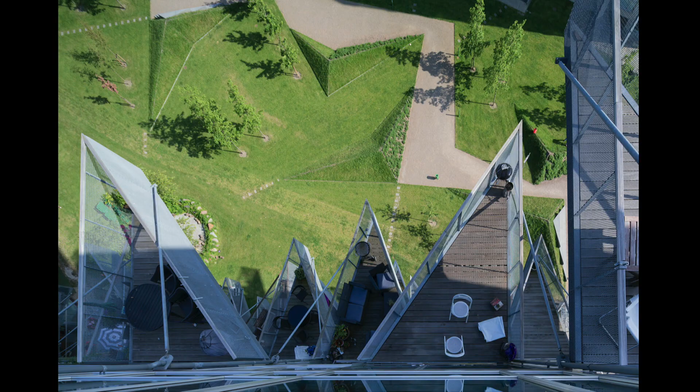Just a few examples - some of our first projects were the VM houses and the mountain in Copenhagen. In the VM houses, we took apartments with balconies 5 meters long, so instead of having an expensive cantilever, they hang from a tension rod, creating this kind of vertical community where, when you moved out onto your balcony, you'd get to know everybody in that vertical dimension. I lived there myself for a year. Inside, they were like three-dimensional puzzles of double-height and triple-height units interlocking.

Next to it, we designed the mountain, which is a parking structure - a man-made mountain of cars. A single funicular elevator gives access to the homes above, and essentially upstairs, every apartment is a penthouse, or it's like having a house with a garden in the middle of the city.

Not so far from there, for the same client, we created the infinity loop that combines shops, offices, townhouses and apartments in such a way that you can actually walk and bicycle all the way to the roof and down again. You can see how children living there can walk out and run down the three-dimensional street and play with their friends.

So you have almost like this kind of small-scale community in the middle of a city block. These two girls live on the 7th and the 9th floor, but they can just walk out and go down and knock on the door.

We've created affordable housing where we worked with prefabricated modularity. You can see the modules are stacked in such a way that every second room is the in-between space. You have two modules and then you have the in-between. You have 2.5 meter ceilings in the bedrooms, and then 3.5 meter ceilings in the kitchen and living spaces because of the way that they're stacked.

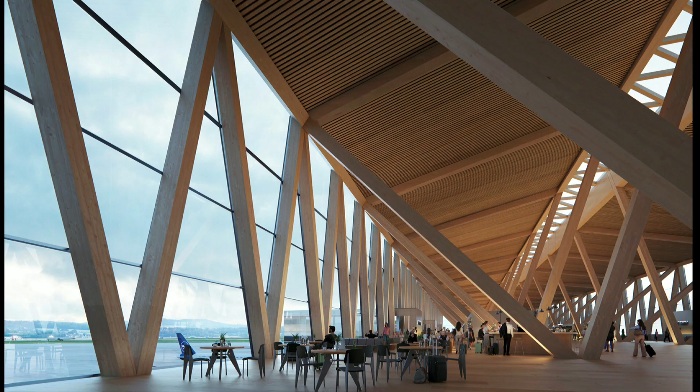And all our timber is from Switzerland. None of the timber comes from further away than 2 hours. So suddenly it almost became the safest choice.

It's like walking through a kind of space frame of timber girders, but essentially the floor, the beams, the slabs - it's not a finish, it's really the material that the building is made of. The only concrete are the foundations and then the control tower that pulls up the skylight.

And you know, as architects, we're always quite nervous when we announce a project - what evil nickname is the building going to get? This one was called the Cafetera, which is kind of an Italian design classic. And it's covered in photovoltaics, powering 2/3 of the airport.

We've done a series of buildings for Google. Alison mentioned Google in London. These are some of the first buildings in San Francisco Bay. They're on the bay, and we created this nice park with Olin around it.

But when you look closer, you can see that these water elements are actually cascading root zone gardens, because all the rainwater that drops on the building is harvested. Then all of the black and gray wastewater is filtered and cleaned in the landscape. So the landscape you walk around in is not only beautiful to look at, it's also high performing, and it sends the water clean into the bay.

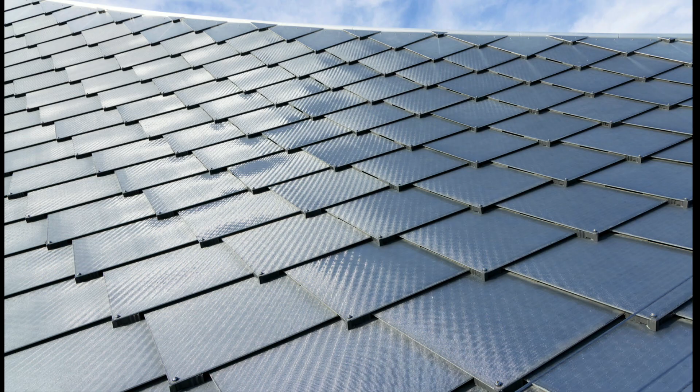The roofs are covered in what the Googlers call dragon scales, photovoltaic tiles, so that every photon that hits the building is either turned into energy or let in through these clerestory smiles.

The kind of catenary shape of the grid shell is the materially most efficient way to make a long span. So the roof is incredibly thin because it's gently sagging as it crosses between the columns. And underneath, you have this mass timber deck, almost like a marketplace for collaboration and innovation. Gradient canopy is where the Googlers are doing their AI now.

But essentially, all examples of this idea of a future that is not only better for the environment, but also maybe more fun to work in and more beautiful to live in.

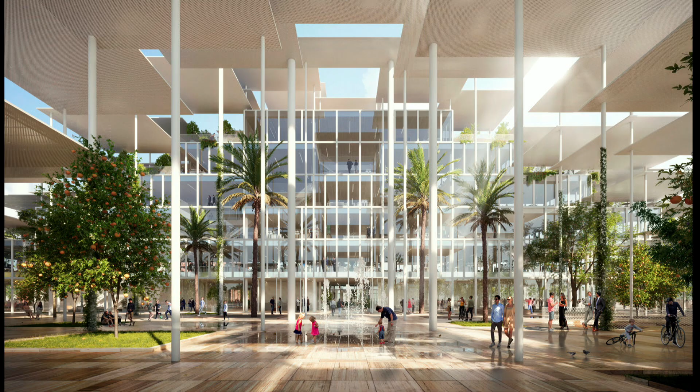Lastly, we just broke ground in Sevilla on one of the hottest days, 46 degrees in June. Sevilla is one of the hottest cities in Europe, and this is for the Joint Research Center for the European Commission. The building is half European Commission office space and half public space, and we created a stepped solar dome of photovoltaic roofs that shade a plaza.

It's almost like a modern interpretation of Islamic architecture with slender columns. It's a naturally ventilated, naturally shaded plaza, which means we could make the facade very transparent, because you're already shaded when standing on the plaza. So the Sevillanos can actually see what the commissioners are doing inside, and of course you have nice shaded spaces for the people working there.

It actually produces twice as much power as the building consumes, so the power goes back into the grid, supplying energy to the city. In 18 years, it will have produced so much energy that it will fully offset all of the carbon invested in building it, and after that it becomes a carbon negative building.

I had the honor a few years ago to go present this project and some other ideas at the Vatican Academy of Art and Sciences. Ursula von der Leyen, president of the EU, also came and met with the Pope. And if you ever have to visit the new Pope and wonder what to give him, he already has a framed photo of one of our projects. So I'm not Catholic, but if I was, I think this could be my ticket.

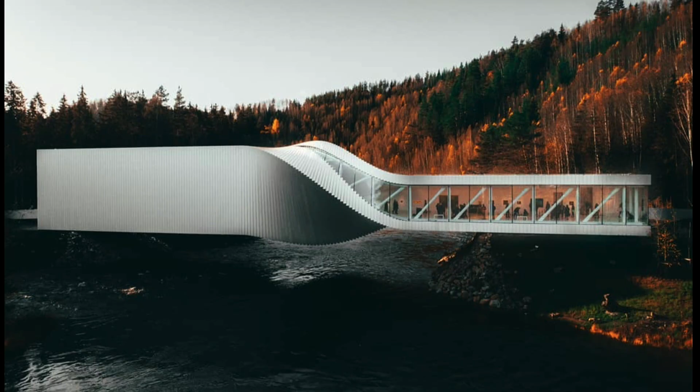This is a museum in Norway in a sculpture park with a river. The museum is designed like a bridge that takes you from one side of the river to the other. You have a vertical space and a horizontal space overlooking the water, and in the middle they turn 90 degrees.

It looks like a sculptural form, but when you look closer, it's actually made out of standard extruded aluminum profiles on the outside, and on the inside, standard timber 2x4s. So even though you see curves and warped surfaces, every element is completely ordinary. Again, it's almost like creating something extraordinary out of something ordinary. All of the ventilation, mechanical, air control and lighting is integrated into this very standardized tectonic.

You can almost say the building is a museum, but it's also a bridge, and also a sculpture in a sculpture park. This is the Danish pavilion in Shanghai in 2010. The bridge was really shaped by the fact that it surrounded this river.

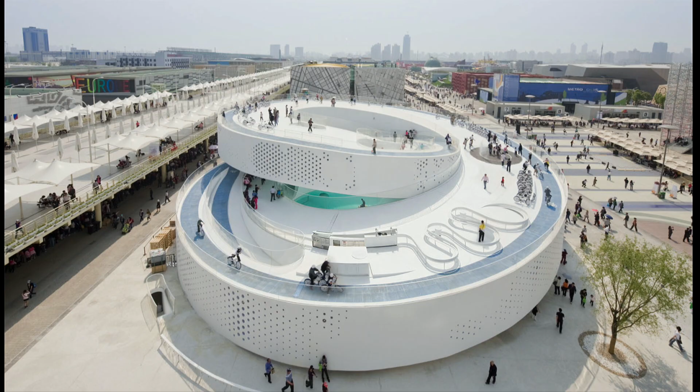In Shanghai, the theme of the World Expo was Better City, Better Life. So we designed the Danish pavilion as a demonstration of all the elements that make Copenhagen more sustainable, but also more enjoyable, almost like a manifestation of hedonistic sustainability. So we designed it complete with the blue bicycle lanes of Copenhagen.

Copenhagen was the first city in the world to have a system of free city bikes, so we brought it to China in 2010 so the Chinese could experience the thrill of riding a bike through the city instead of being stuck in a traffic jam. It also made it the perfect museum for impatient people, because you could do the whole thing in 5 minutes on a bike.

At the heart of the pavilion, we brought the harbor bath, allowing the Chinese to experience how clean, if not how cold, Danish harbor water is.

Finally, we thought, how can we get the Chinese to come? In the Chinese public school curriculum, they have 3 fairy tales by Hans Christian Andersen, the Danish fairy tale writer. One of them is the story of the Little Mermaid, the national symbol of Denmark. So we proposed to bring the actual mermaid statue to China for 6 months.

I had to go to Parliament and argue that it was a good idea, and as you can see, we got her. Then we had to get her through Chinese customs, and finally she made it to the pavilion.

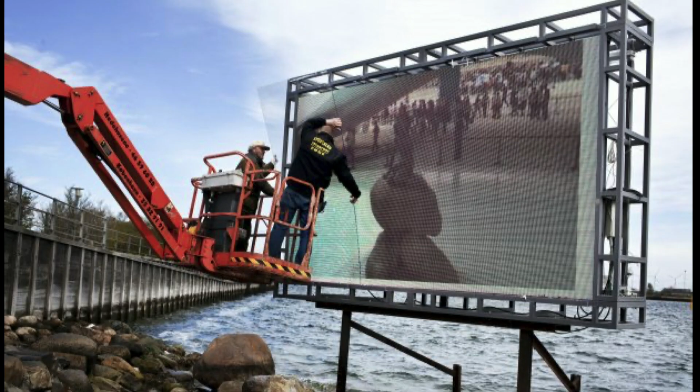In her absence, we invited Ai Weiwei to make an installation, and he installed a Chinese surveillance camera in the pavilion that was transmitting a live TV feed to a giant screen he mounted where she would normally sit, so all the tourists who went in vain could see that she was fine, just in China. He called it the Mermaid Exchange, because for 6 months it was the only uncensored live TV footage from China to the rest of the world.

We didn't really build in China until 2020, when we got invited to make an art museum in Suzhou, as part of the Jinji Lake District. It was going to be right next to a Ferris wheel. Suzhou is actually the cradle of the Chinese garden, and it's also the hometown of I. M. Pei, but somehow this is where the Chinese garden comes from.

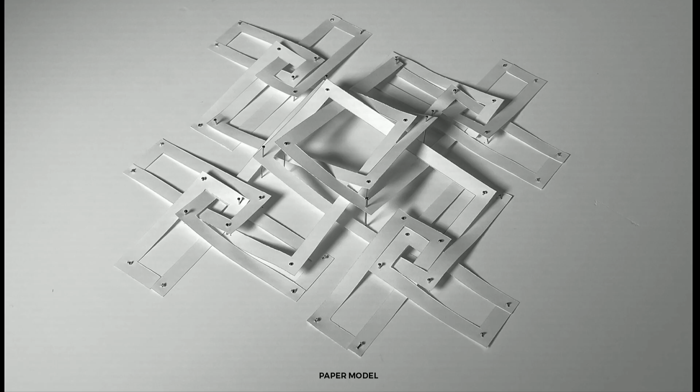This series of pavilions with sculpture yards in between creates a porosity, so you can pass from the city all the way out to the lake. You can see the benefit of the Ferris wheel—once we digested the fact that it was there, it gave us a perfect argument to make the roof incredibly nice, because it's really going to be the fifth facade that everybody in the Ferris wheel looks down on. It becomes this porous exhibition program organized into individual pavilions, connected with little galleries extending all the way into the lake.

We're currently rushing to finish the building—I have an absurd amount of photos from it. In between, it starts creating a feeling that even though every floor plan is only 90 degrees, everything orthogonal and quite rational, the gently curving roofs produce a very complex outdoor and indoor gallery experience, like various kinds of gardens. Eventually there'll be a lot of outdoor sculpture, and you have this interplay between the man-made and the natural.

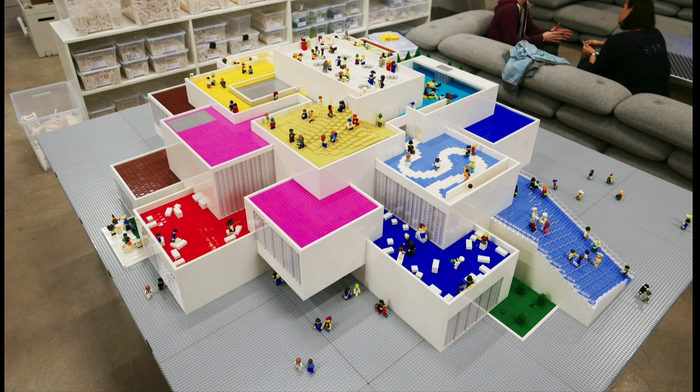It's the family that makes Lego, and they invited us to do the home of the Lego brick in the hometown of Lego. Of course, the architecture model is made out of Lego. A Lego minifigure is 1 to 50 scale and roughly proportioned like I am. And this is the final result.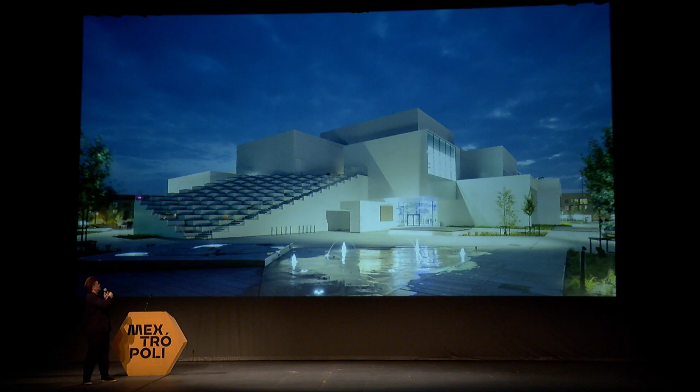We tried to imagine an architecture that would be as inviting and engaging as Lego itself. The roof is complete with interconnected playgrounds where you're allowed to hang out without a ticket—you can climb, some of the bricks almost melt and provide access. The building is also open in all directions, so you can enter the Lego Square, where the galleries above are pulled apart so daylight and air come down. Again, you can roam around freely without a ticket, and only when you ascend into the galleries do you need one.

At this point, it may be the only museum in the world where you're encouraged to touch all the artifacts, because Lego is not a toy—it's a tool that empowers the child to create his or her own world and to inhabit that world through play, and to invite her friends in to join her in co-creating and cohabiting that world.

That is essentially what architecture is all about—that as human beings, and especially as architects, we have the opportunity to imagine what kind of world we would like to live in, and then to create, co-create, and cohabit that world. It almost leads me back to the Danish word for design, formgivning, which literally means form-giving, because to design something is to give form to that which has not yet been given form—in other words, to give form to the future. When you're designing a building or a place or a space, you're giving form to the world, or at least a little fragment of the world that you would like to find yourself living in, in the future.

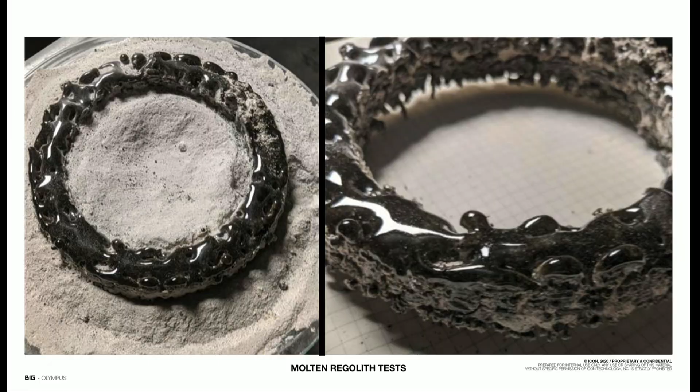In 2028, NASA is going to land a laser printer manufactured by ICON, and they're going to make essentially a paver. And if it passes the tests, it should unlock the funding to create a permanent habitat for 4 astronauts to spend 30-day missions on the moon.

One of the things we have to deal with is radiation. So all of the water for consumption and bathing is stored in the walls of the bedrooms, because the hydrogen in water is a very good shield against radiation.

And then, of course, there's a lounge, because the same side of the moon is always facing Earth. So there's the Earth lounge to prevent homesickness. When you sit in the Earth lounge, you can always see Earth.

But a completely other dimension, which is more near Earth, is a project that I've been spending the last 2 years of my life working on with the government of Bhutan.

I met the king of Bhutan when he came to England for the coronation of King Charles, and then he came and stopped by in Copenhagen, and I had dinner with him, and he said, 'Come to Bhutan. I want to make a city, because even though we do a lot of things well in Bhutan, it's the most sustainable country in the world.'

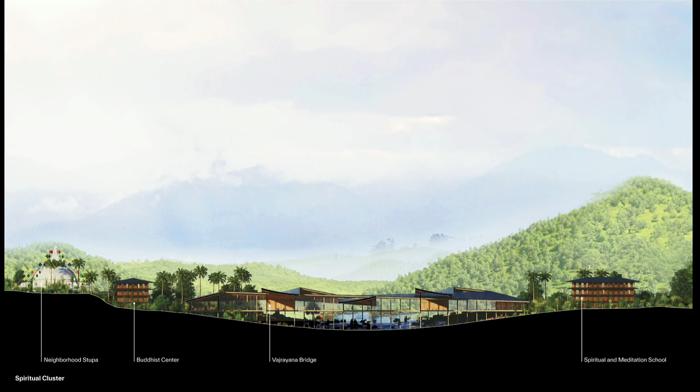I'll return to this. In the highlands, in the north of the city, you have hospitality - you can enjoy the tropical nature and the mountains. You have various kinds of education, spirituality, meditation, mindfulness. You have agro-technology, forestry, modern ways of agriculture and forestry.

Then you start getting more to the kind of dense European scale city where you have education, business, and public functions. And finally, you have a dry port with trains that connect into India and an airport that connects to the rest of the world.

Right now, there's only 7 pilots in the world that can land in Paro in Bhutan, because you have to kind of nosedive down between the mountains. Once we finish the Gelephu airport, you can actually reach Bhutan from 5 billion people.

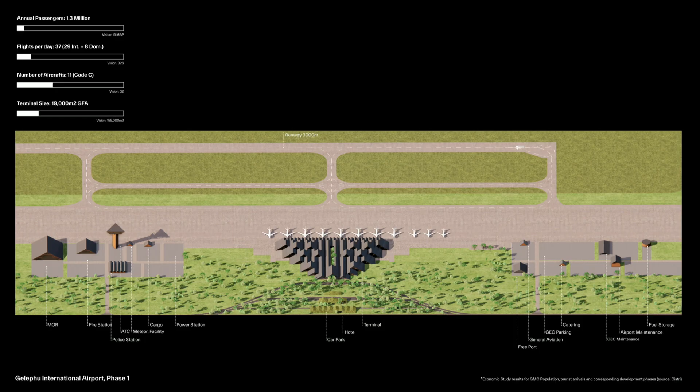It could almost become a gateway to South Asia. And we designed it so it could be built with local materials and in a modular way, so that as the city expands, it can expand gradually without becoming a kind of Frankenstein of terminals.

The city, the whole territory of the special administrative region, is 2,500 square kilometers. It's 82% forest, and we actually bring the forest down all the way to the airport along the rivers, as a way to capture the identity of where you're arriving—you arrive in a forest.

The arrival area is shaded by tropical trees, and we continue the forest into the rainforest courtyard. So when you're going through customs or passport control, or waiting for your luggage, you're next to a forest.

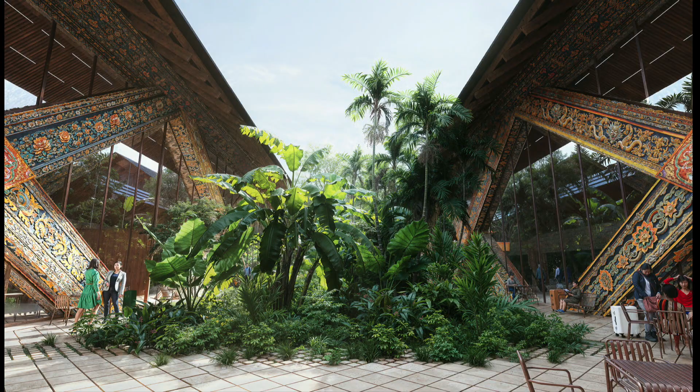We try to somehow emanate it. Bhutan has a very strong identity and a very strong culture, so the modularity of the airport somehow evokes the traditional roofs of Bhutan. They have 8 large schools that educate carvers, stonemasons, and painters, so we are literally combining hand-carved and CNC-milled ornamentation into the structure. Even though the building is kind of contemporary and modern, it feels rooted and undeniably Bhutanese.

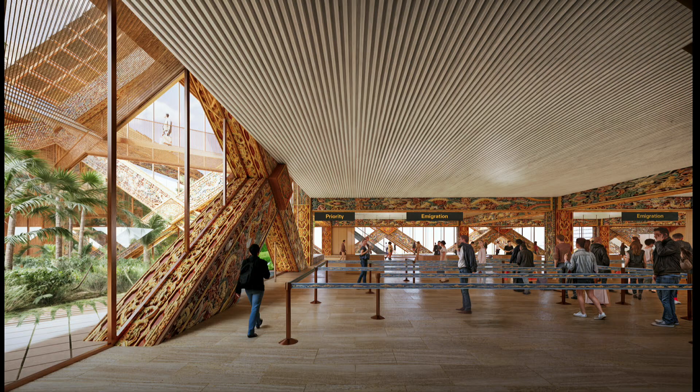For us, this has been a huge leap to even get the idea to work with ornamentation like this. But somehow, because all the crafts are still alive, it's not pastiche—it is really the living, breathing Bhutanese culture as it is today.

So the lounges overlook the mountains over the rainforest courtyard, and when you arrive, this is the first impression you get as you wait for your suitcase—you're standing in the forest. I like to say the biggest problem could be that people don't want to leave the airport.

The city is shaped by the rivers. The rivers provide nutrition for the agriculture, but they also provide migration routes for the elephants—I hope you saw them, three elephants walking from Bhutan to India.

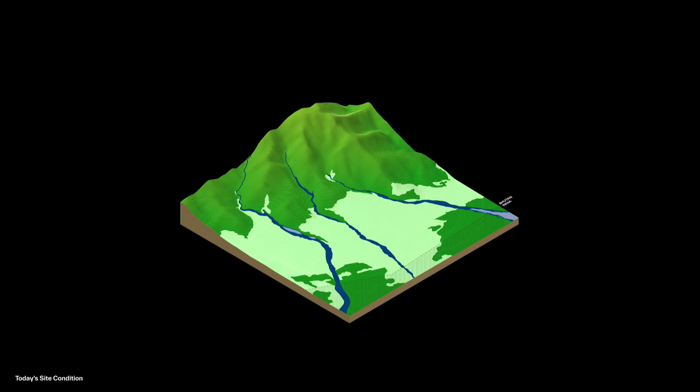So we basically preserve the rivers by making them into long linear central parks. Then we have smaller community parks. Since you have seasonal rains, you get this kind of gravitational water management using the smaller parks.

Then we terrace the city almost like rice fields, and it densifies as it gets closer to India. The main transportation corridors run east-west, and every time a major street crosses the river, it becomes a public building.

So this is phase one, where you can see there's already an existing village, and here you can see how the neighborhoods are shaped by the flow of the water.

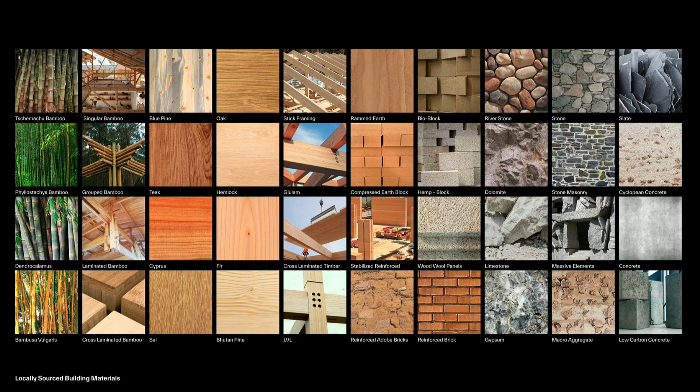It's built with locally sourced materials—river rocks, rammed earth, various kinds of timber, bamboo—paved with permeable pavement so the seasonal rains can penetrate into the ground. We've developed an architectural language that combines the craft and existing traditions while providing accommodation for a more modern form of living.

The ground floor is always open to the public. Schools can take advantage of the public space, so you see teaching and activity as you move around the city. Higher up, people live among the rice fields.

You have tourism, spirituality, hot springs, and essentially the whole system is designed around water management. So the rivers...

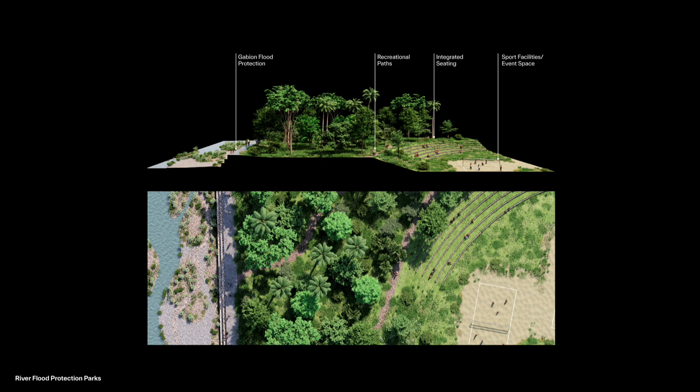have very seasonal level changes, so we need to somehow contain them—to contain the elephants on one side and the humans on the other, because they're wild elephants. So you have this kind of public program.

On the human side, you also have canals for kayaking, pools, and habitat for wildlife, so it becomes a major resource for the people living there. The smaller parks are seasonal, becoming little creeks in the rainy season—so the seasons really become part of the public space.

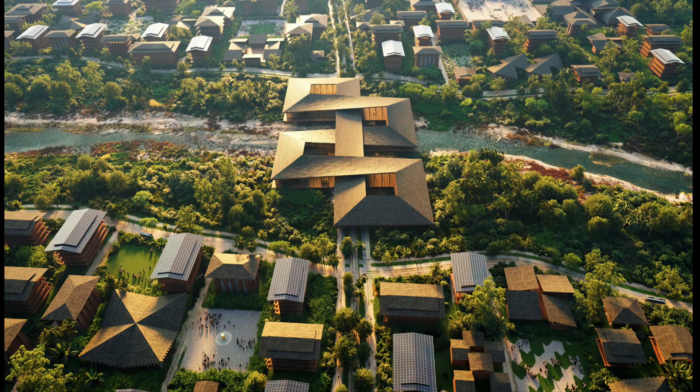And lastly, I mentioned the bridges—each bridge is also a program. So you have a Vajrayana Buddhist center where you can cross the river and listen to the teachings of spiritual masters, a healthcare bridge that bridges from one side to the other, combining Western and Eastern medicine.

A university—you can imagine a kid walking to school in the morning, imagining what he or she wants to become when grown up. An agricultural bridge, a market bridge, a manufacturing bridge, and of course traditional dzongs, stupas, and temples. I already mentioned we're designing 3 landmarks.

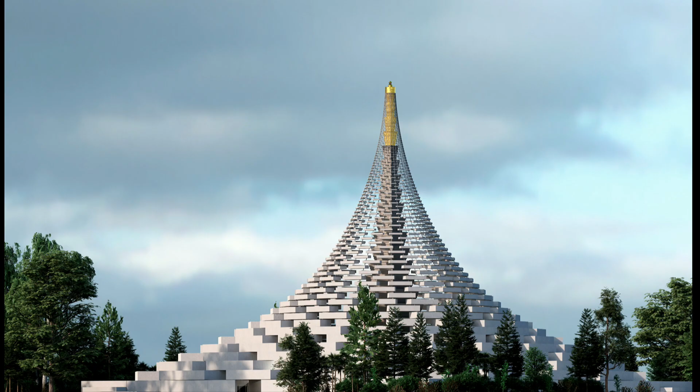Of course, the airport, but then also a Vajrayana museum that is built with all the elements you would find in a temple or in a stupa, but more as an introduction. So if you are not a practicing Buddhist, you might not feel welcome in a temple, but here you can sort of enter and understand all the different aspects of the practice of Vajrayana Buddhism, but without disturbing anyone in prayer.

And then lastly, the last project I mentioned in the beginning, the whole city is powered with water power, renewable energy. And we're designing the dam using traditional colors, like pigmented concrete elements, almost like a Bhutanese interpretation of an Indian stepwell, so that you can actually descend down the face of the dam. Anyone who's been to the Hoover Dam has imagined how cool it would be to rappel down the face. But here you can actually hike down to a temple, like a contemporary interpretation of the Tiger's Nest that is nested on the face of the dam.

And in many ways, the dam is like this kind of utopian pragmatism, it somehow turns engineering into an art form. It turns the forces of nature into a source of power, but it also turns, let's say, the infrastructure for energy into the infrastructure for spirituality. So in many ways, I hope that the Temple Dam somehow captures all of the values that we have tried to bake into the city. It's a piece of pragmatic infrastructure, but it has this kind of utopian aspiration.